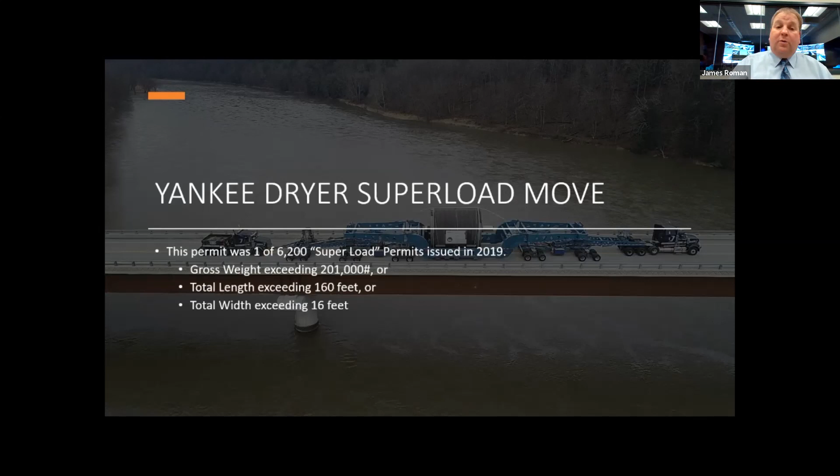So what we're going to be discussing today is a superload move that occurred last December. It was an industrial dryer moving from the Port of Erie to the city of Lock Haven to the First Quality plant. This was one of 6,200 superload permits issued in 2019 by all the districts combined. Pennsylvania's definition of a superload is a load with a gross weight exceeding 201,000 pounds, or a total length exceeding 160 feet, or a total width exceeding 16 feet.

This dryer was part of a $450 million expansion project at First Quality Tissue in Lock Haven. The dryer was shipped from Sweden to the Port of Erie.

The first preliminary application, at least that was brought to my attention, was submitted in February of 2018. The dryer moved from December 5th, 2019 to December 16th, 2019. Total route length was over 300 miles.

This application took on a life of its own. It required coordination between the Central Permit Office and the permit, traffic, and bridge units in Districts 1, 2, and 10. The preliminary application sparked a lot of different conference calls and meetings. This started in February of '18, and the permit wasn't issued until December of '19 - we fought this for well over a year and a half.

The other dryers at the plant were shipped into the Port of Philadelphia and then trucked to Lock Haven. They remember those dryers being delivered here in our office - they were a fight, but not like this one.

The actual dimensions of the dryer were a gross weight of 628,000 pounds, a total length of 217 feet 4 inches, total width of 20 feet, total height of 19 feet 11 inches. You can get a grasp of the size of this thing when you look at it compared to a full-size pickup parked next to it. This picture was from the Port of Erie.

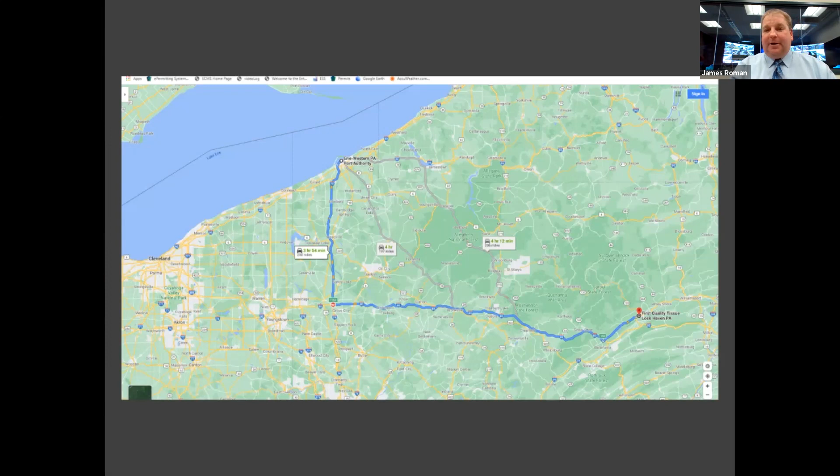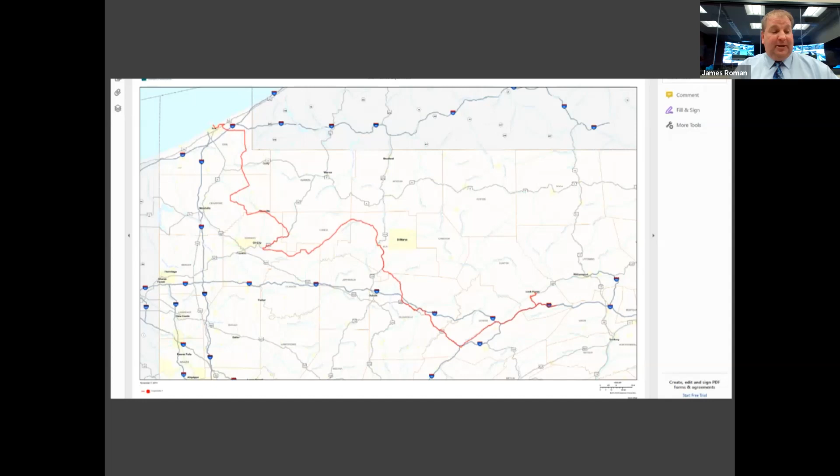In reality, this is the route they ended up taking. It increased the trip length from 230 miles to 304. It required multiple crossovers and wrong-way movements on SRs 879, 322, 220, and 120 within District 2, and literally took this route over the river and through the woods.

All of the different structures that the load crossed required manual computations for maximum load allowance. These were done manually by Peak Engineering - they were hired by the hauler, then reviewed by the district. We also required pre and post bridge inspections.

This move was completed in December, so they were out there in January in boats doing the post inspections.

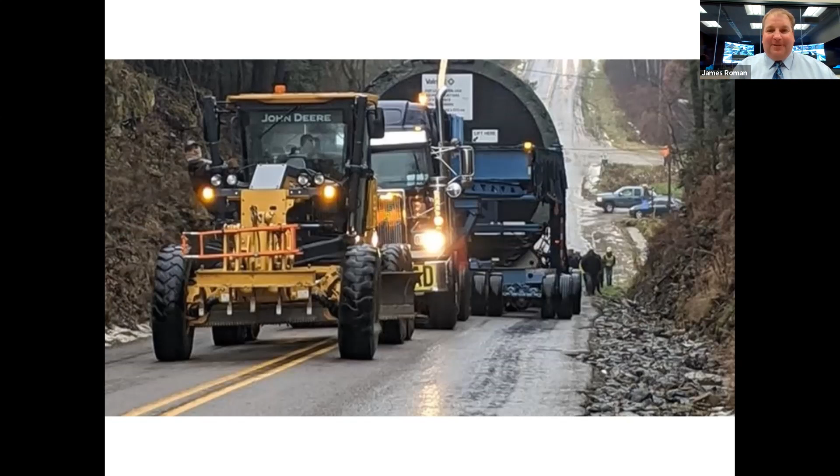It's a very unique move. The first day it traveled 7 miles. This is day 2 - due to traction issues, they weren't able to make this grade.

They showed some ingenuity and hooked up to it with a grader. It's rumored but not proven that the operator said, 'Hold my beer and watch this,' before he started tugging it up the hill. I believe the guy hanging off the side of the grader is there as a counterbalance, but I'm not exactly sure what his function was.

It seems comical at the time, but this literally started the conversation: should we pull this thing off the road? Can they safely get it the route that they've picked?

Because basically the horse was out of the barn, we decided to allow them to continue. What they did is bring in additional push trucks as well as additional bucket trucks to start lifting the wires.

Again, you can see how it's taking up both lanes of this typical section of a two-lane roadway, so obviously no oncoming traffic can pass.

Traffic control was handled by 4 state troopers, 3 up front to close the roadways off for oncoming traffic, and 1 following behind so no one would approach the load from behind. That worked pretty well because no one likes to argue with the guys with the badges and guns.

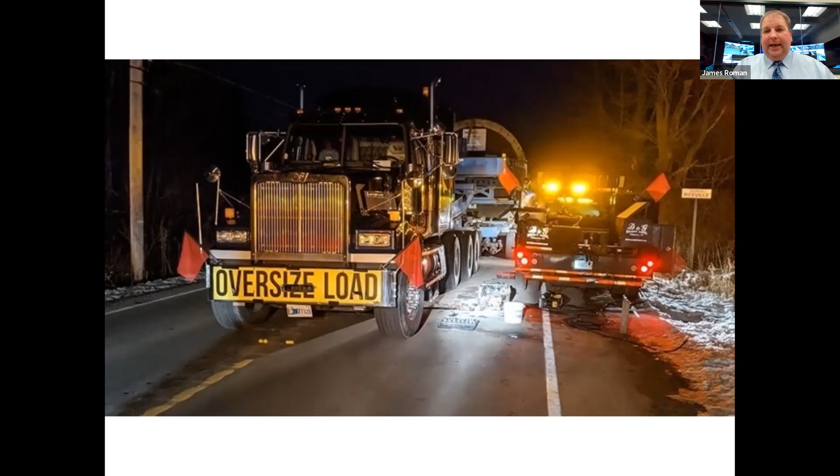Had 2 separate breakdowns during the trip. This was day 3, and they did not get off to a good start. This was up in District 1. The load was fixed and operational by about 7 p.m., so we had a nighttime closure of this route in District 1. The detour was implemented and enforced by our district maintenance forces, so we had to call a crew out to handle this one.

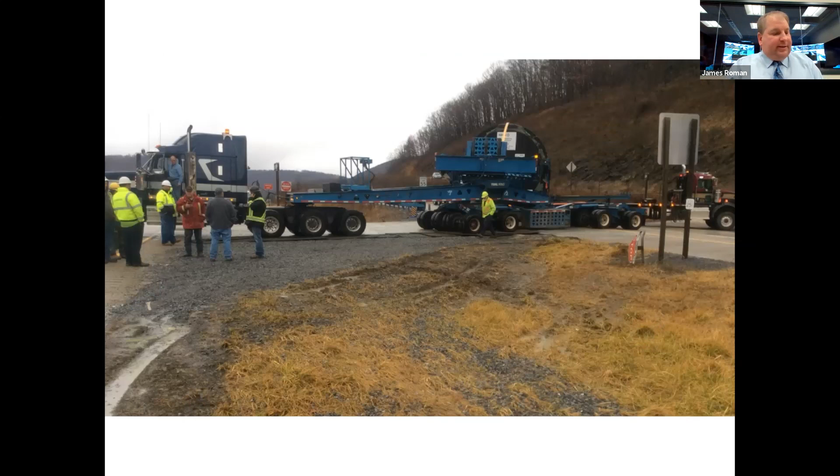This is down at the bottom, just outside of Port Matilda. They had to do a wrong way movement, going eastbound in the westbound lanes of 322, in the divided section. Then at the bottom of the mountain, they needed to use a crossover, which was to be widened and stabilized. Unfortunately, the stone they had put down for the widening was too saturated because it was a rainy, snowy day, and it ended up getting hung up. They brought in more crane mats, etc. This shut down 322 eastbound and westbound for over 3 hours, just west of State College.

The second breakdown was on I-80 between Lock Haven and Loganton, in the climbing lane section of Interstate 80 in the easternmost part of Clinton County, at mile marker 182. All 3 lanes of Interstate 80 eastbound were closed for multiple hours. They were 5 miles short of the crossover they needed to reach at the end of the day. This delayed things because they had to go east of Lock Haven to turn around and come back west to avoid an overhead bridge. During the overnight hours, when they finally got it to the crossover to park, it snowed.

The following morning we had a conference call between PEMA, the department, the hauler, and our county maintenance forces from Clinton. They pre-treated I-80 starting at 4 a.m. We had to call at 5 a.m. The guys out there on the mountain felt it would be okay to go, but as an added safety feature, we had a plow truck lead it down off the mountain until it got into the city of Lock Haven.

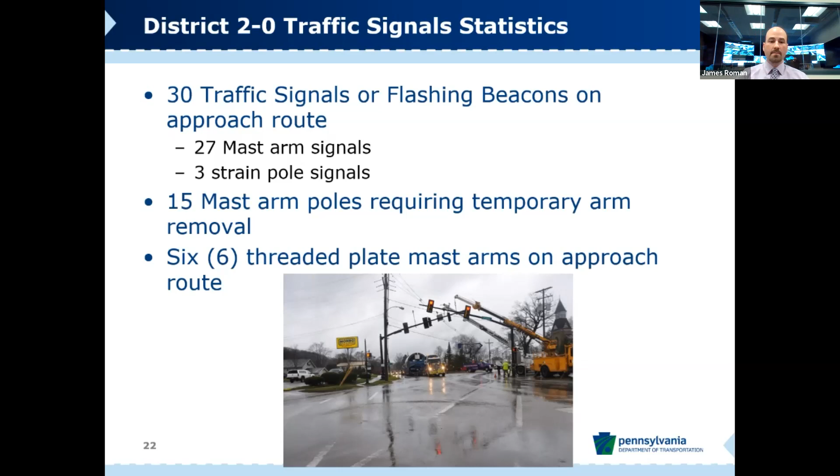I'm going to cover that in a bit. There were 6 threaded plate mast arms on this particular route that we had the most concern with, due to them being banned. I'll cover those in more detail in a minute.

The hauler wanted to know what our drop-dead requirements were. We had concerns - number one, in the Commonwealth of Pennsylvania, PennDOT doesn't own the traffic signals. In our district we had 12 municipalities, and we wanted to make sure the hauler communicated with them and took into account any issues or concerns - phone calls, emails, we wanted to see documentation. In fact, one municipality wanted their own contractor out there on the day of the move, so that communication was important.

Anywhere an arm was removed, we wanted to make sure the bolt hardware was replaced with new hardware, and that proper bolt testing was done in accordance with our procedures in Pub 408. We didn't want to see tip lifting of mast arms that were still bolted - you'll see slides and videos showing it's not tip lifting, I'll explain that further. We also didn't want them loosening foundation anchor bolts and spinning the poles around the foundation. These poles were in some cases 40 years old - very old infrastructure that we don't own.

We wanted to be very conservative in this load for the safety of the traveling public. Threaded plate mast arms, we didn't want to see them manipulated. Anywhere there was radar or video, non-intrusive detection, you've got to calibrate those units and draw detection zones. If you move those, there's a chance your zones are now kind of out of whack. So that was a concern.

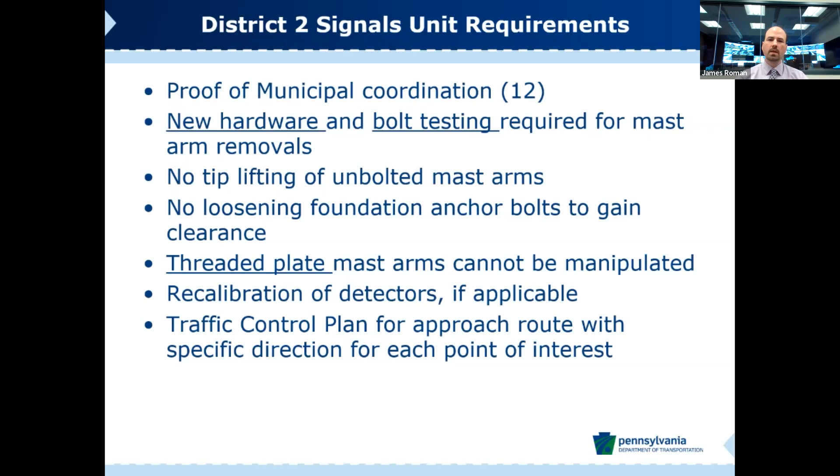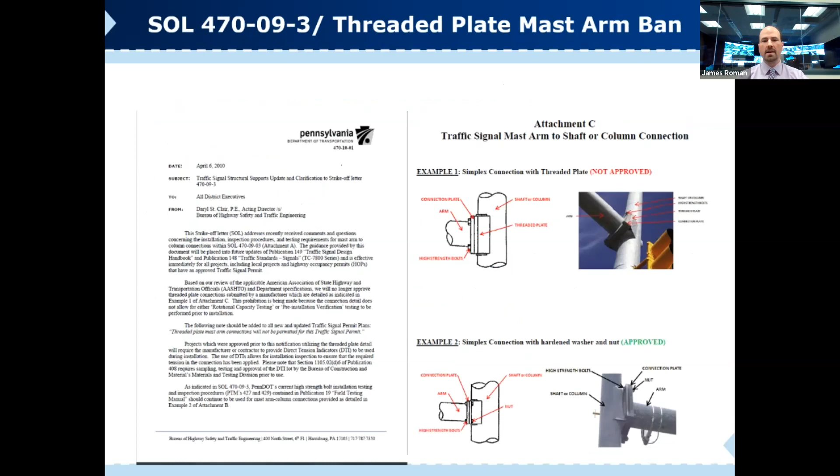According to strikeoff letter 470-09-3, these are now banned in Pennsylvania. The reason they're banned is because there's no way to test the bolts.

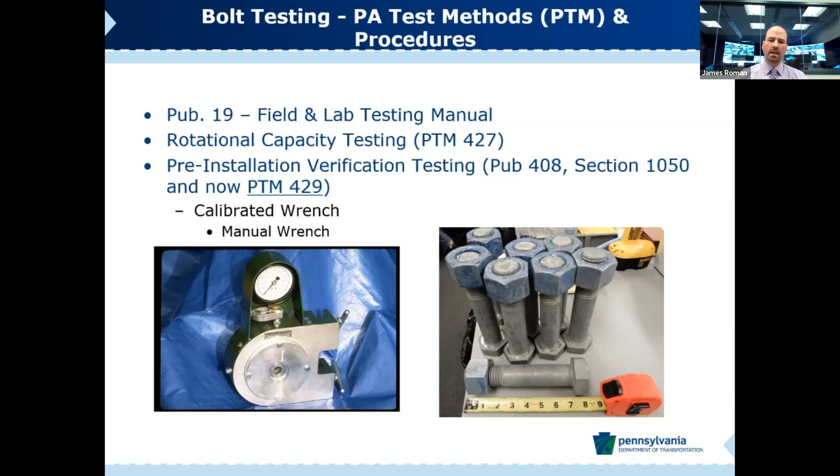The traffic control plan, very important. We had several requirements for this. We wanted the entire approach route analyzed for any overhead utilities. They encountered overhead truss structures, mast arms, utilities, a lot of things, bridges, and Bridge did their own analyses. Unfortunately, we don't have someone from Bridge with us today to speak for that part of it, but those guys put a lot of hours into this too.

Truck turning templates - you know, this truck is very unique, it could do a lot of cool things. You're going to see some videos here, but we wanted them to prove where you say you can get around mast arms, we want to see that on paper. Show us your turning templates. That's not different than any other design we would typically review. We ask for those.

Nick talked about earlier, route restrictions - you know, this was a good strategy. They did wrong way driving. It avoided the overhead obstructions.

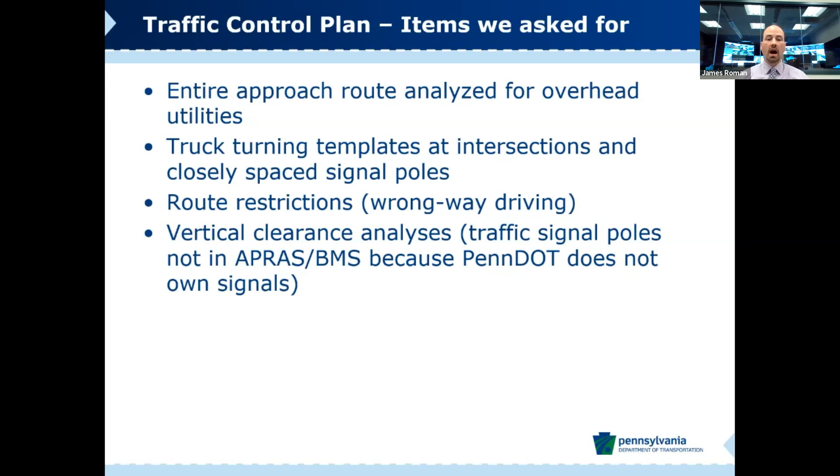Vertical clearance analyses, you know, they went out, they measured these things. We have to inspect the poles because our bridge unit doesn't - it's not part of APRAS or our BMS system. That falls on the traffic unit to do these inspections.

Couple pictures here - you know, you may have a guy with a pole holding the utilities up, or in most cases, you actually had bucket trucks. Nick had mentioned that earlier. The hauler had to go deploy a lot more of these. Those bucket trucks turned into a very useful asset for the hauler in doing the move in 10 days.

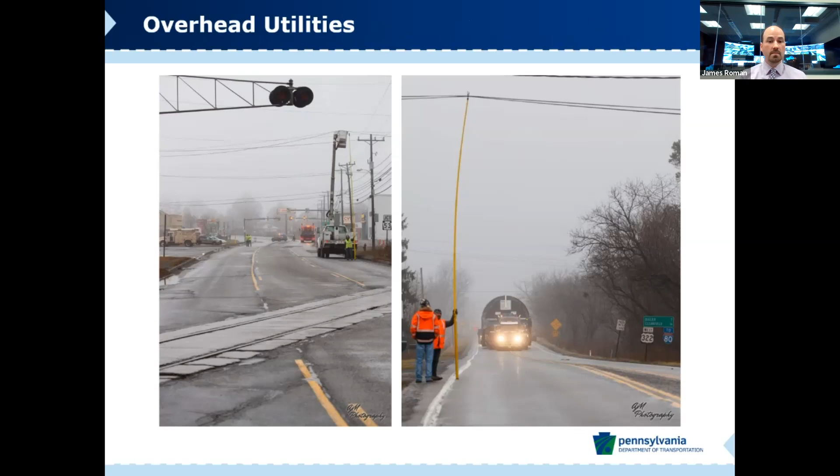Sometimes you need one, but as you see here, you got a whole convoy of them. A lot of coordination with this - two-way radios between the driver, the state police, the convoy vehicles, everybody, the contractor. Communication was very important to see this thing through properly.

Now here's a picture of the signal pole getting raised. This is not tip lifting. How they did this, of course, there's a bucket truck with the strap. The signal contractor, where the arm meets the upright pole, would remove each of those bolt assemblies one at a time and replace it with a bolt with a smaller diameter. That smaller diameter bolt, threaded to a nut in the back, allowed some wiggle room in the pole, and that is how they were actually able to lift it properly. So it was still connected, but there wasn't any stress put on the joint of the arm pole connection.

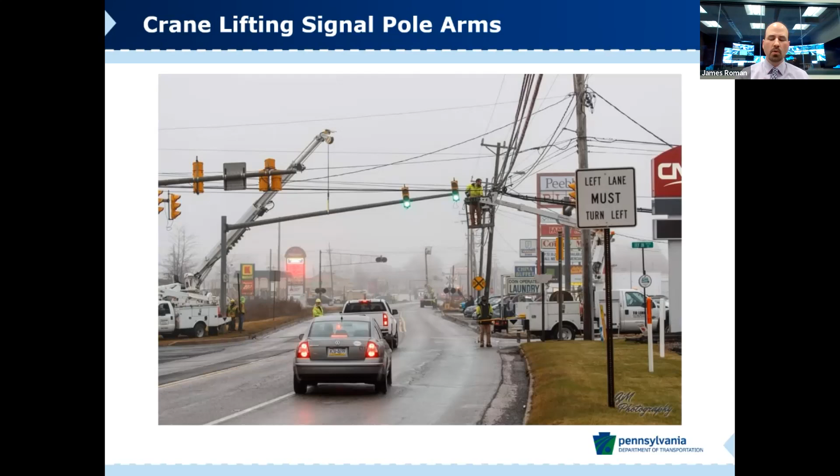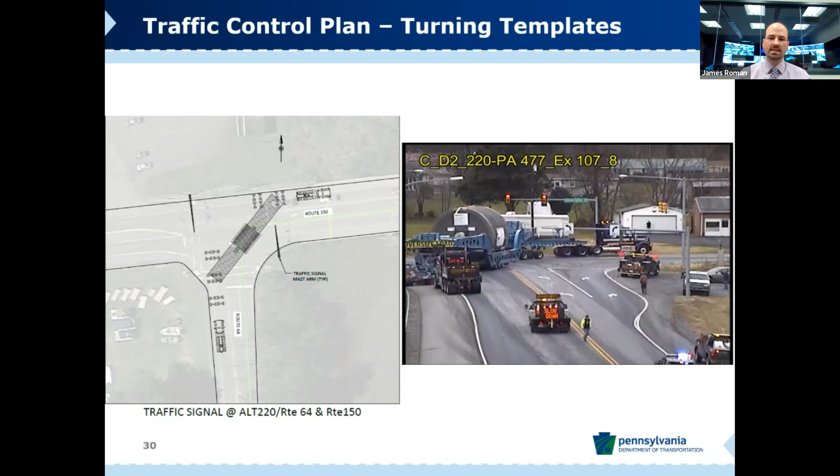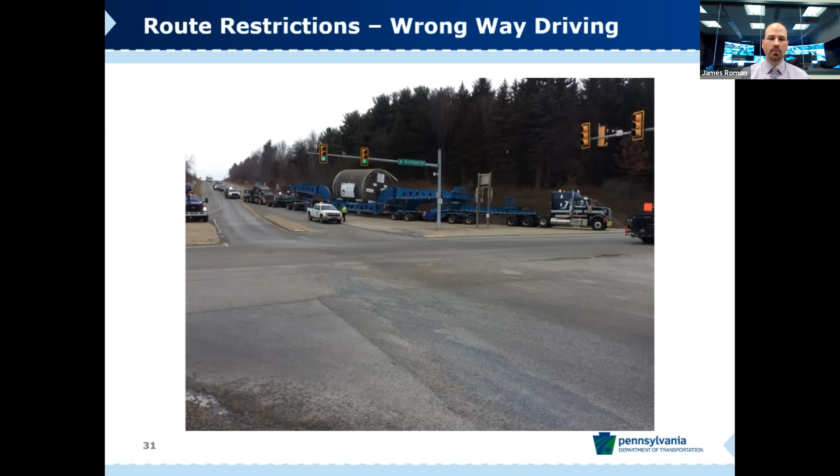Here's an example of turning templates we asked for on the left - that's their proof that the truck could make it through the intersection without impacting mast arms. The photo on the right shows, in fact, that's how it went the day of. That's a photo from one of our CCTV cameras showing the load moving through that same intersection. Wrong way driving again, a great strategy, avoids signal poles, keeps costs down for the hauler.

As far as some of the engineering part of it we got into, you know, this load, and like I said earlier, the truck had some very unique ways that it could maneuver around and about.

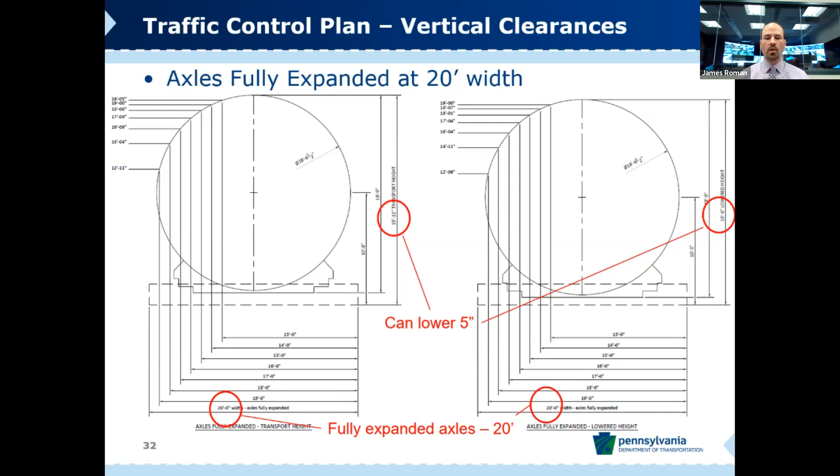It could actually lower only 5 inches. That's not a lot, but every inch counted with this thing. Its axles had the capability of being retracted. Normally it sat 20 feet wide, but as it went through some intersections, it could retract them to 14 feet, so the wheels could pull in. The benefit of that is you could allow the load to get closer to the curb line.

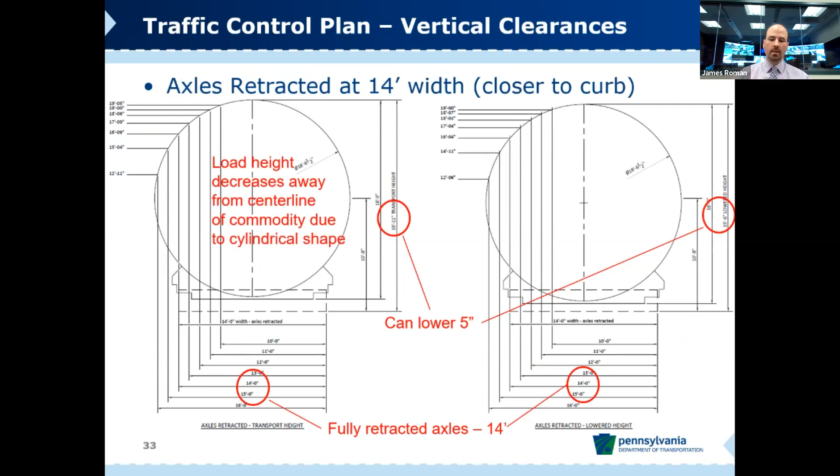As you can see here, the commodity's cross-section is circular in shape. Of course, the worst case scenario is at the center line of that commodity. As you move further away from the center line, your elevations drop. So that was another strategy that was very useful: retracting the axles and lowering the load to get through the intersections.

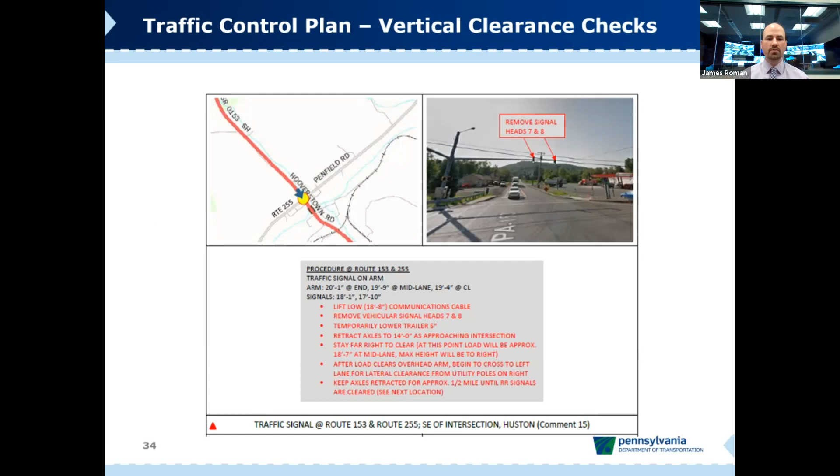Here's a specific example I'd like to show you. This is the intersection in Penfield that Nick spoke about earlier. Peak Engineering went through and put together a list of requirements that we were able to give to our inspectors on site, so they would know ahead of time what was going to happen there. Here you had to lift some communication cables, do something with the signal heads, either remove or flip them, lower the trailer 5 inches, and retract the axles to 14 feet.

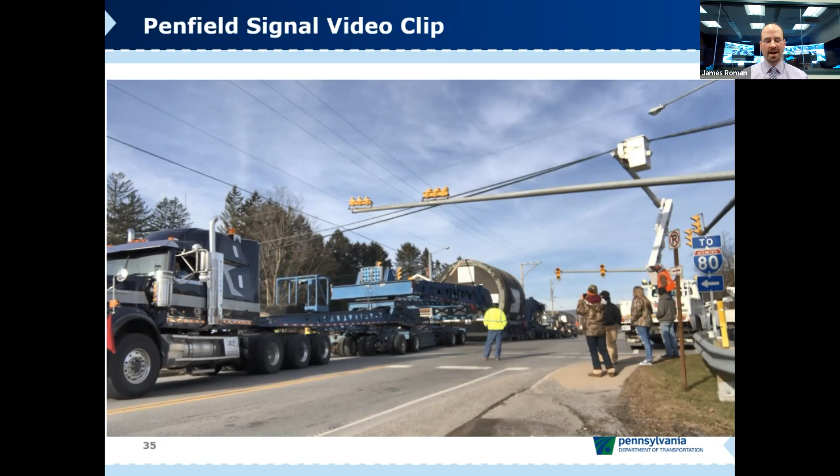So here is actually a video showing this the day of. You'll notice the bucket truck lifting the utilities, and you'll notice the signal heads flipped. You might also notice a lot of onlookers here. This was a popular move. Every little town had a lot of people watching this.

Unfortunately, the video doesn't show the end, but it did make it through this intersection without any major impacts.

Right behind me, you can see we're presenting in our Regional Traffic Management Center. This is a great asset that was used during the days of the move through our district. Our operators could watch along where we had CCTV cameras deployed to see what was going on. We had inspectors on site, but more eyes for documentation helped see if there were any problems.

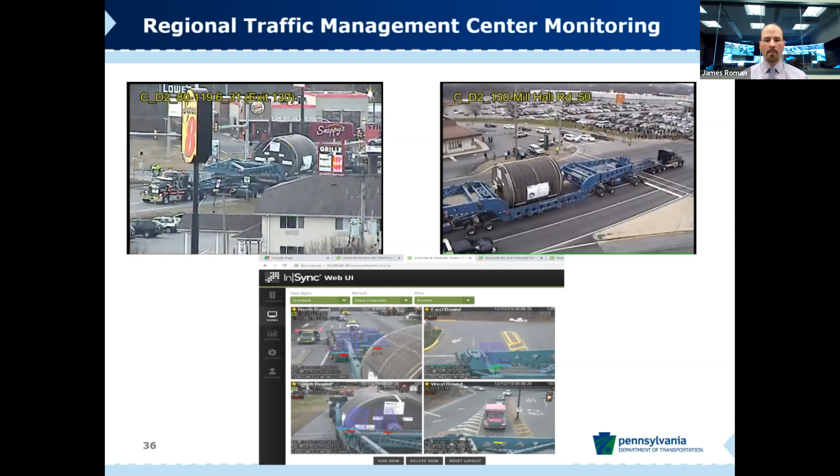The top 2 photos show CCTV images at signals. The bottom one actually shows our Rhythm InSync adaptive system on Route 879 in Clearfield County that has video detection. Again, another tool for the operator at the district.

Next, I'd like to cover some lessons learned. We found out winter assignment inspectors were very key. We used 4 of them. They were the boots on the ground, good for documentation, and did a really good job keeping us informed on what was going on. We used the traffic control plan to get out the problem areas ahead of time.

Where's the tight turning radii? Where are the threaded plate mast arms? Our inspectors knew ahead of time. We had those lists created.

Like Nick said earlier, the early morning moves were critical, getting out there before the commuter traffic was on the roads. That wasn't originally planned for. That was something that came in as the move started, and it turned out to be a great strategy. It lessened the impacts tremendously.

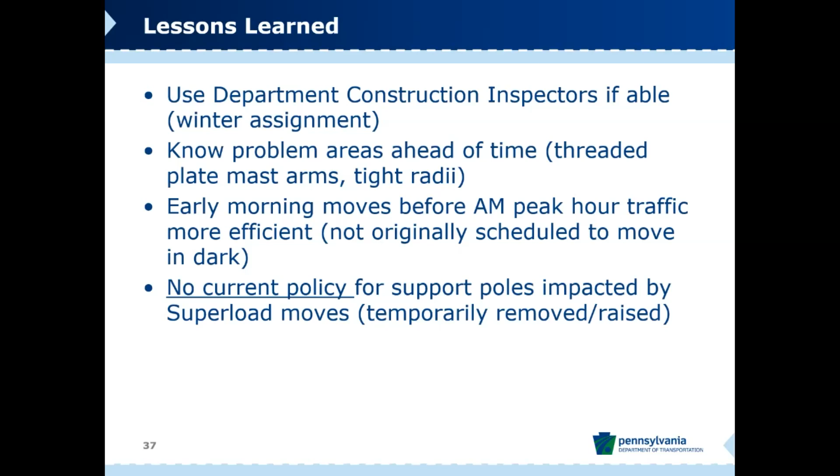One thing we could look at in the future - of course you always have things to work on - we really don't have a policy when we remove arms impacted by superload moves like this. There wasn't necessarily consistency across the districts. Every district kind of said, well, this is how we want to see it done. Might be something worth pursuing and looking at in the future.

I'd like to show last a time-lapse video in Ridgway showing how this all went down. There's actually 2 signal poles being impacted in this intersection - the one you can see there ahead of you, and one off the screen a little bit. You can see the bucket trucks going through, state police, and contractors out there. Again, a lot of effort, a lot of people put in some man hours on this move.

We have trucks with poles that check for height and clearances.

Here comes the superload. It's interesting to watch the truck go through the intersection and see how it manipulates its wheels and backs up a little bit to get through. Pusher truck coming through. And of course, after the truck went through, the work still isn't over yet. We got to get the intersection back to how it was before the load came through.

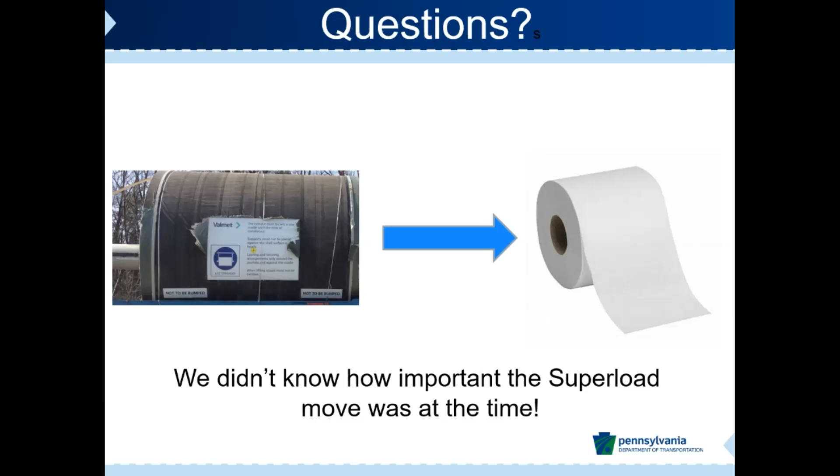The second question: was there consistency between the districts along the route and for the RTMC regions regarding the contents and requirements of the TCP? Yeah, in most cases it was centrally led. Nick was kind of working with central office directly from District 2. We had so many meetings and conference calls to discuss what the requirements were, and pretty much everybody was in unison that this is how we're going to go with this. I can't speak for what happened in the other districts, but I know what happened in District 2, and we tried to be consistent as much as we could.

One final question: how did you coordinate with railroads for the railroad crossings? Our grade crossing engineer was actually also involved in this. Like I said early in the presentation, it wasn't just traffic or permits or bridge, our grade crossing was involved. If you put down the man hours from the district of what people actually worked, I think it'd be astonishing. It was all hands on deck, and anybody who had relevant involvement, even our utility person, was brought on board into the team. We did have internal meetings and meetings with all parties, including the hauler and their engineer.

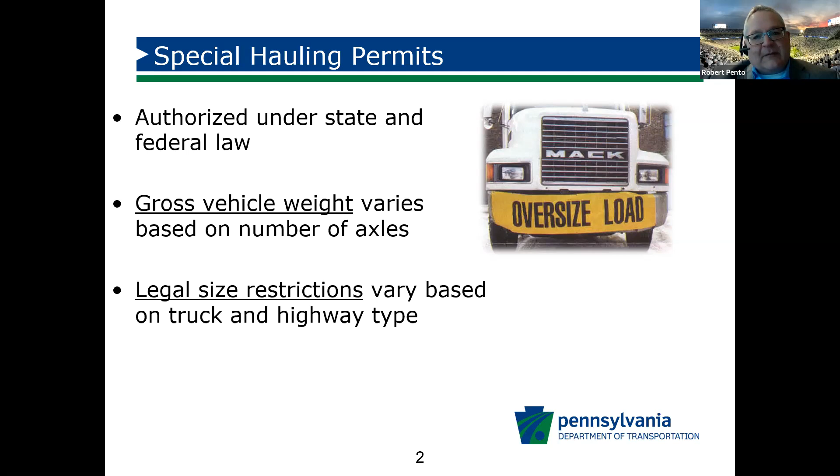To give you some background on special hauling permits themselves, these are required to move vehicles or loads on Pennsylvania highways that exceed the legal dimensions or weights specified under state or federal law. Gross vehicle weight is one consideration, and that can vary by vehicle and number of axles, but typically that's an 80,000 pound maximum weight for a legal load. Anything over that typically would require a special hauling permit. Dimensional restrictions also apply, and these can vary, but typically legal size would be a maximum of 8.5 feet in width, 13.5 feet maximum in height, and length of 53 feet, which is your typical tractor trailer. Next slide.

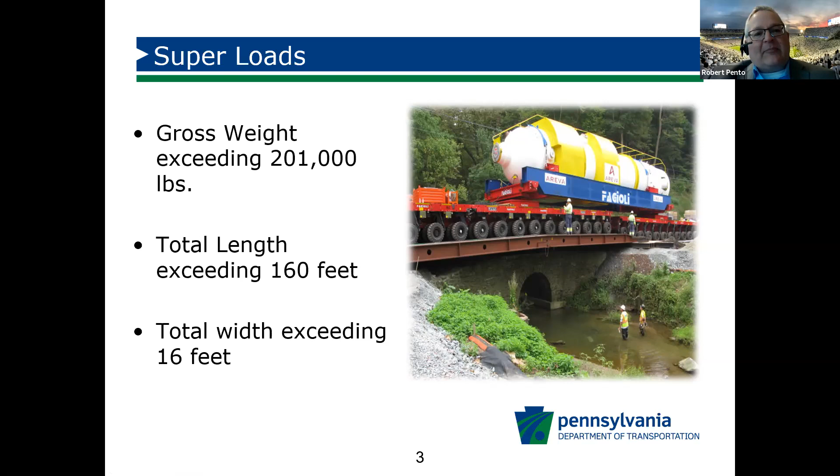So you probably all understand this, but why do we need to issue special hauling permits? Beyond the fact that this is state regulation, the focus is really preserving highway safety and our critical infrastructure. In 2019, we had over 7,000 crashes on Pennsylvania roadways involving heavy trucks, in which 122 fatalities occurred. 22 of those fatalities were occupants of the trucks themselves. So this is definitely an important safety issue that we need to focus on.

From an infrastructure standpoint, of the 41,000 miles of state highway we manage and maintain in Pennsylvania, this type of traffic takes a significant impact. In fact, a federal study indicated that road damage from one tractor trailer combination is equivalent to approximately 9,600 cars. We've got 25,000 state-owned bridges, and approximately 13% of those are structurally deficient. These are all factors that have to be considered in the movement of these oversized and overweight loads.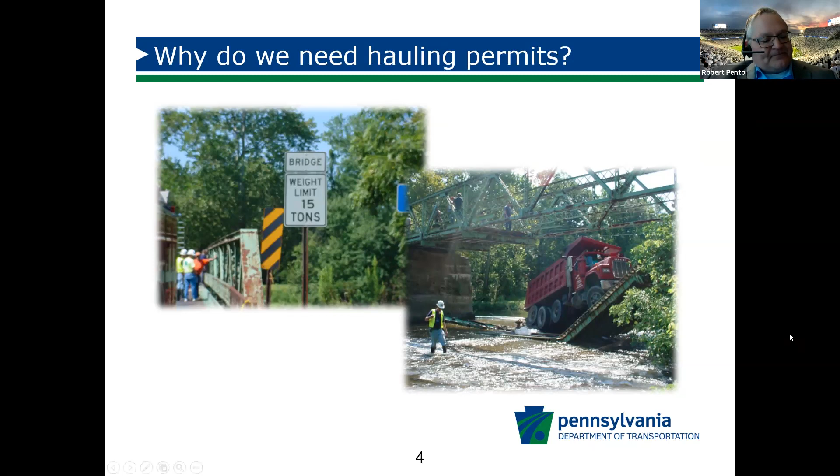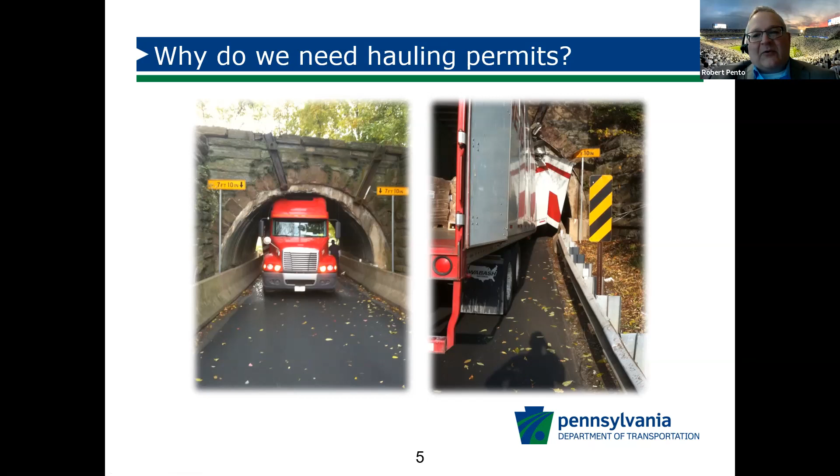Just a couple other pictures to give you a sense of things that can happen when route is not considered. This is an ongoing issue - bridge strikes. Even at legal height, these things happen. So it's critically important that all restrictions are considered and analyzed before an oversized or overweight movement occurs.

So just to give you a little sense of what APRAS is, this is PennDOT's Automated Permit Routing and Analysis System - an in-house application that was developed and launched in 1998. Users access this online, and they propose a route for their movement. This online system is used to issue over 400,000 oversized and overweight permits per year.

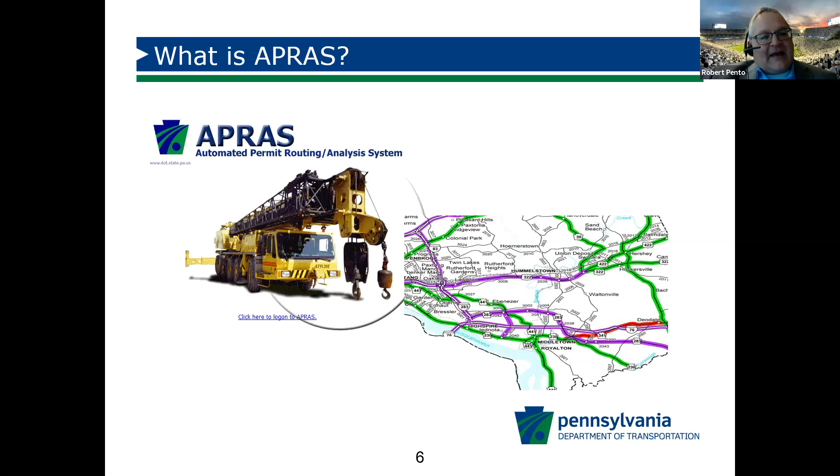Some of you may be familiar with APRAS, but we really recognized there was a big need to modernize this system to get it up to national standards and meet industry expectations from our haulers and customers. So we've undertaken a multi-phase project to modernize APRAS. I'll cover another couple slides here, and then I'm going to hand it off to Ben to go into details on how we're approaching that and where that stands.

So APRAS conducts an automatic review of the selected route. The haulers enter a proposed route, and an analysis occurs that looks at the bridges along the proposed road, whether any of the routes are posted, looks at tight intersections, any ongoing construction that could impact the movement during that specific time frame, and other factors considered automatically as part of that analysis. Once that analysis occurs, the system either automatically generates a permit or denies it.

63% of these are auto issued. We call this auto issued when there's no manual intervention from PennDOT's behalf to issue that permit - the system automatically does the analysis. The remaining ones kick to what we call a manual review. Those, because of some specific restriction - it may be a bridge, it may be some location with a restriction - may take someone from PennDOT's bridge unit or a traffic unit in an individual district to look at that proposed route and determine whether that load at that dimension or weight can pass through there.

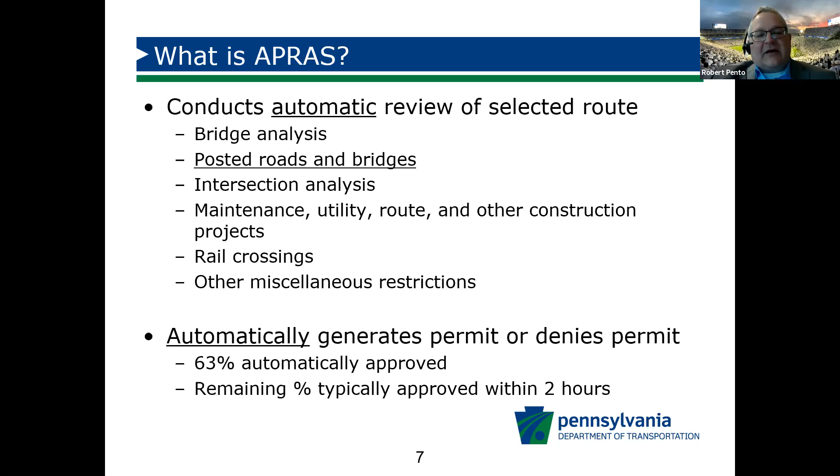That typically occurs, and those remaining permits that can be issued are typically issued within about a 2-hour time frame from the time they're entered. Others may take longer, depending on the complexity. Obviously superloads are a completely different animal - these would be your kind of run-of-the-mill oversized, overweight movements.

So in general, our goals for modernization were really to approach this in phases. Our first phase, which was released last year, really focused on the customer - modernizing the customer interface for our system. It was a complete technology upgrade, and we recognized that we wanted to move to map-based routing.

Our previous system, which we call APRAS Legacy, really required the haulers to build their routes and enter them link by link. We wanted to move to a map-based interface because that's really become the industry standard and what customers expect. We also wanted to improve the workflow for PennDOT permit staff that use the system, as well as improve our route generation and analysis. We wanted to move to a system that would propose a route to you, as opposed to you having to suggest a route and the system basically telling you yes or no.

So those were our goals of modernization. With that, I'm going to hand it off to Ben here, and he's going to go into detail on the improvements to the system as it stands now and where we're going.

Bob, as you transition here, a question of what are the wheelbase restrictions? Is that more of a WB62 or a WB67? I think it varies, and that's part of the analysis. If it's something that can be auto issued based on the route and the restrictions entered into the system, either coming out of RMS or manually entered, it'll auto issue. If it's not, it'll flag to manual review, and the traffic unit staff or permit staff will take a look and make that call as to whether that design vehicle can pass through.

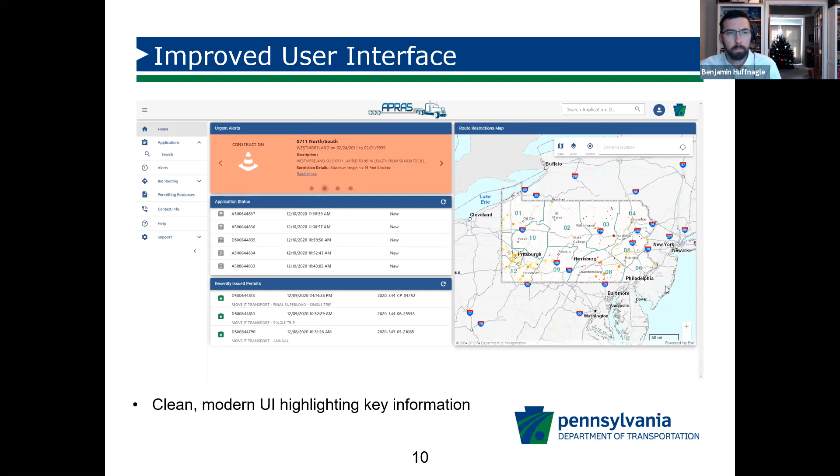This restrictions map would show road closures, construction, and other temporary restrictions, and some of those can vary. For a road closure, obviously there's no traversal. However, a key fact they find is this is only northbound. Similarly, for construction, it may not be that the road is entirely closed.

It may be a new width restriction, height restriction, or length restriction, so it gives them the information they need to do their detailed planning. This goes back into a lot of things we're talking about here, kind of back into that auto issue rate that Bob was talking about.

These are some very obvious things when you're planning your route. If you request a route that goes over the Camp Hill bypass northbound between November 13th and December 14th, you're not going to get a permit because that road is closed. In the previous system, carriers needed to build their own routes in a text-based format and had no feedback until it got to PennDOT. So it could be something very obvious, like if you asked for a route that went over a closed road, there's no way you're going to get that route. Similarly, if you have a 16-foot high truck and there's a 12-foot high bridge, there's no way you're going to get that route.

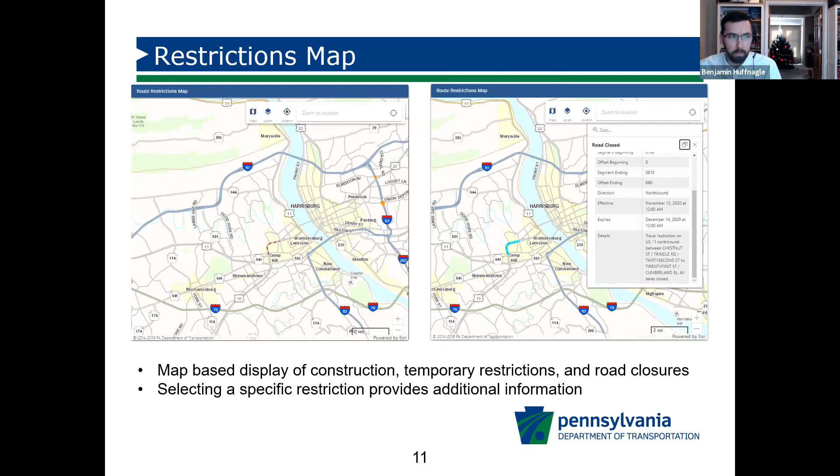Similarly, one of the other data screens we have shows posted and bonded routes. As you see on the left, this shows all of the posted and bonded roads in the Commonwealth. Anybody familiar with a map of the Marcellus Shale Formation can see there's a correlation here, especially with a lot of fracking going on. These are becoming more prominent.

So this again allows haulers to do their planning. By default, they would not be able to route over those roads, but especially for those that do have bonds, if they enter the bond information showing that they can traverse that road, we will route them over there.

Some useful information that comes up here is if there is a section of bonded road, it shows where it goes from, what state route it's on, the effective date, and who holds the bond. In case this is a carrier that doesn't hold the bond on that section of road, it allows them to reach out and contact to see if they can get permission to traverse and go there, so that if that's where they need to go, they can go.

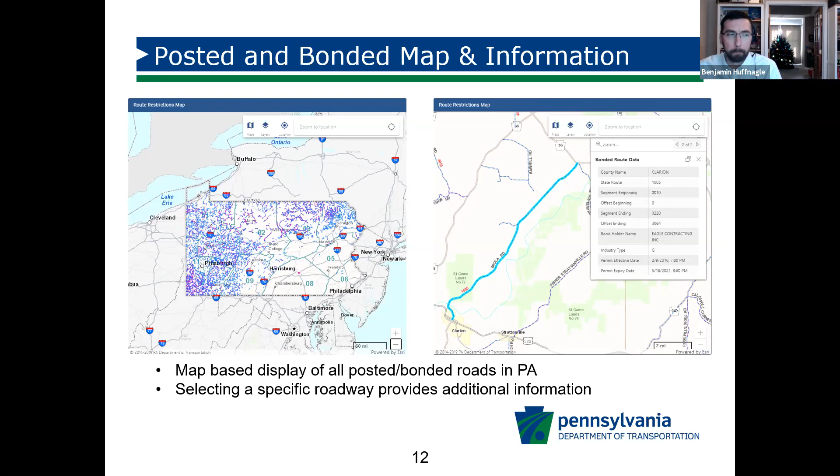When we get into the interface for actually submitting an application, a lot of things the team took forward were: make this as clean and clear as possible, make sure we're doing things expected of a modern application, highlighting fields that are required, giving some feedback as users go. And then, more importantly, we have some adaptive data entry.

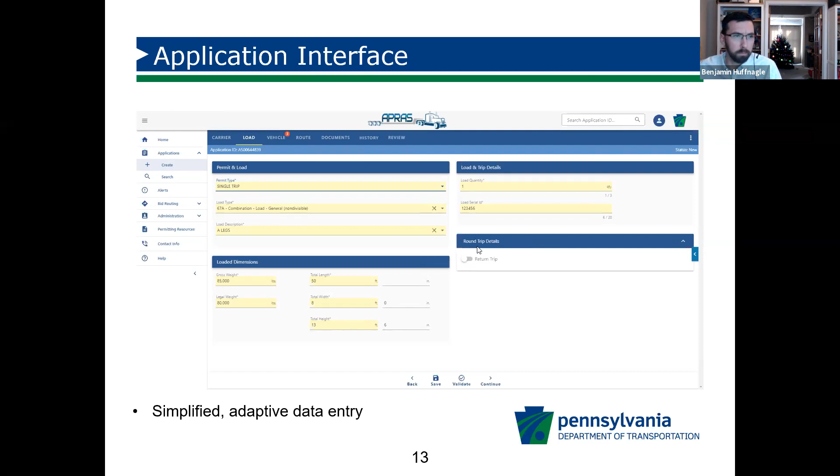When we get to the heart of this, it comes down to map-based routing. As Bob mentioned, this is something not only generally accepted from haulers who see other systems used across the country, but it's just part of our life now. If you're going somewhere using Google Maps, you're not using a paper map or planning this by yourself. This is something we wanted to bring in.

Previously, as mentioned, all of that planning fell on the haulers beforehand, at which point they had a series of drop-down boxes to select which state route they were traversing, in which direction, going to the next state route, hopping off, and the like, so that all of that planning can now be brought into the system. What we're showing here is the actual interface the haulers would use, simply by selecting a start point, selecting an end point, and asking the system to suggest a route.

This system will generate a traversable route, the most efficient route just going by distance and speed. At this point, when suggesting a route, it takes into account temporary restrictions, road closures, construction, vertical clearances, horizontal clearances, as well as posted and bonded roads.

The actual weight calculations, that live load analysis we talked about, still happens on the back end. We're looking as we modernize to see if we can improve the performance on that, but the response time from all of that was taking a bit. So that's now part of some of the more detailed analysis.

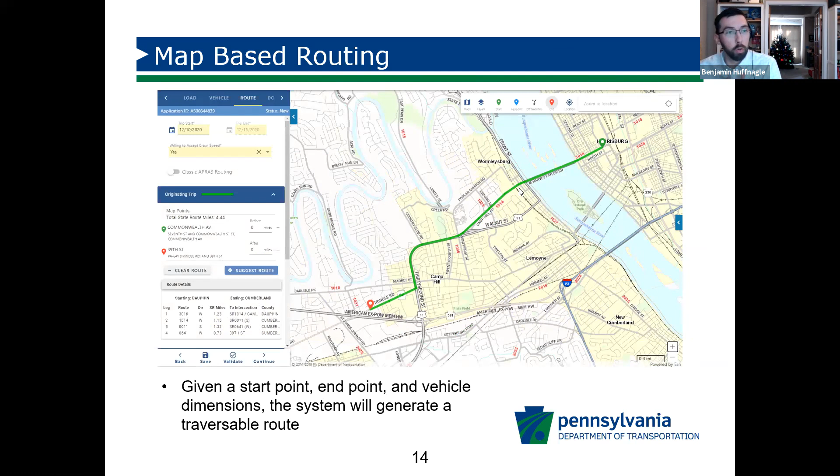Showing what happens with an overhead structure, this is actually the same route we just showed. It'll be right here where we see the railroad crossing coming off of the Harvey Taylor Bridge. On the left is what happens when you ask the system to suggest a route with a 13-foot 6-inch high vehicle, and it goes straight through on the bypass.

If you change the vehicle dimensions to 14 feet 6 inches, the system will force you to regenerate the route. You can't have a route, change your dimensions, and then submit that route. It will ask you to regenerate, and you'll see a fairly different route. In this one, there's a 13-foot 10-inch railroad bridge, so that shows the routing around it.

We're looking at potentially, as we go forward, showing more detail as to why some of these things are happening. But unfortunately, while this one is fairly obvious as far as what's being avoided, there are some cases where the route change can be very significant for some avoidance, and trying to zero in on where the change occurred can be difficult.

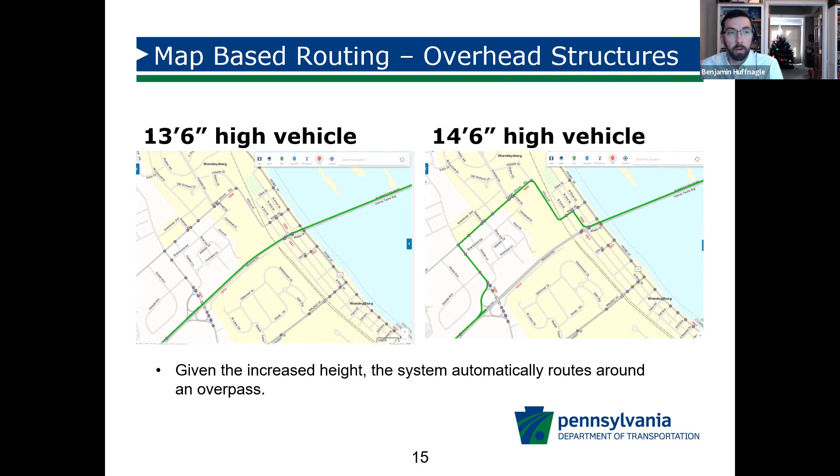That's actually shown better here, for the restriction we showed, that road closure on the Camp Hill bypass. We have the route flipped, so you're going northbound. On the left is when the restriction is not active. If you remember, it expires on the 13th or 14th of December.

So the permit on the left would be requested starting on December 16th. The route goes as one might expect if they don't know of any restrictions, right up Trindle, Camp Hill bypass, and over to Harrisburg.

If you were trying to travel during that travel time, I'd set the start date of the move to December 10th. The system will now generate a route that goes around that. As you can see, much more complex, not what somebody might expect if they're saying get me there as efficiently as possible, but here we're actually going around that restriction.

Something that, were they to have requested this permit, it would have gotten denied because they're trying to travel through a road closure. Again, this allows them not to get hung up by these obvious misses, and makes sure they get their permits issued as quickly and as automatically as possible.

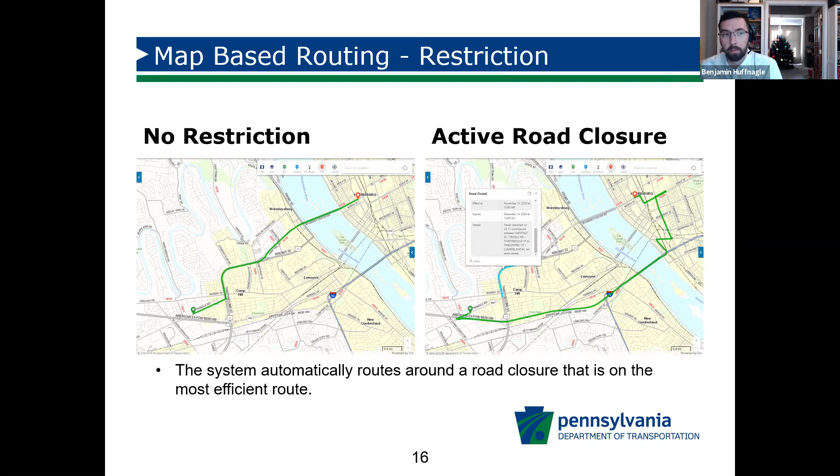One of the other things we allow, and we intentionally say suggest route, this is not, when the system generates a route, necessarily the route you must take. We're showing a safe route and the most efficient, as the computer says, but not necessarily the route you may want to take. So what we've allowed is the use of waypoints.

This is the same route starting in Harrisburg, going over to Camp Hill that we had before. But in this case, the carrier decided that, let's say they're much more comfortable going on highways, or they don't want to go across the Harvey Taylor Bridge, so they've put this waypoint on 83 southbound.

When they put that in, the system will generate a route that, rather than just going from start to end, goes from the start through all waypoints given and to the end. Here I show one waypoint, but there could be many. So if a carrier was trying to make the exact route they want to go, they could in theory put a waypoint at every turn, and the system would go there.

Usually, and anybody that's messed around with Google Maps trying to get the route they want will know, usually one or two waypoints will steer it where you need to go.

This is important because the best route isn't necessarily the most efficient route. What the best route is for one carrier is not the same as for others, so this allows for that flexibility.

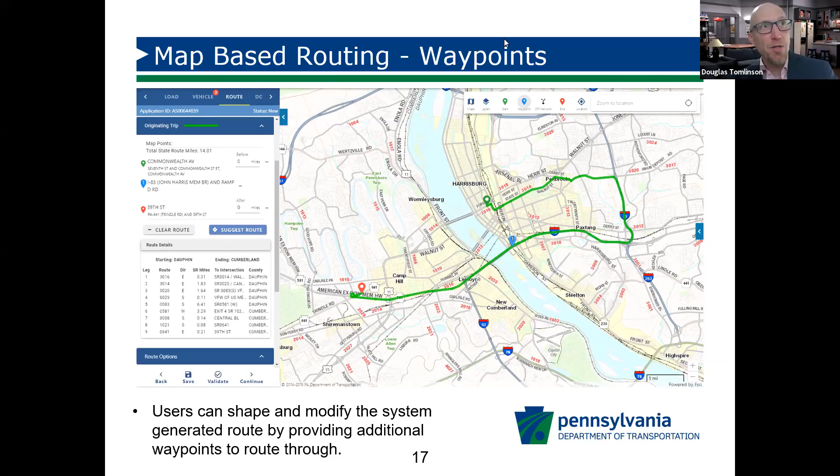One final question from an anonymous attendee, also known as Steve Galt: for the moderator, did you arrange the light in your workspace so the reflection from the light in Seinfeld's apartment on your head would align properly? Actually, my head is just perfectly aligned to all lighting conditions, Steve. It works under all lighting environments.

All right, I think we've come to the end. I liked that session, I got a lot of good information out of that. Hopefully everybody felt the same. We had about 50 attendees that stayed with us the whole time.